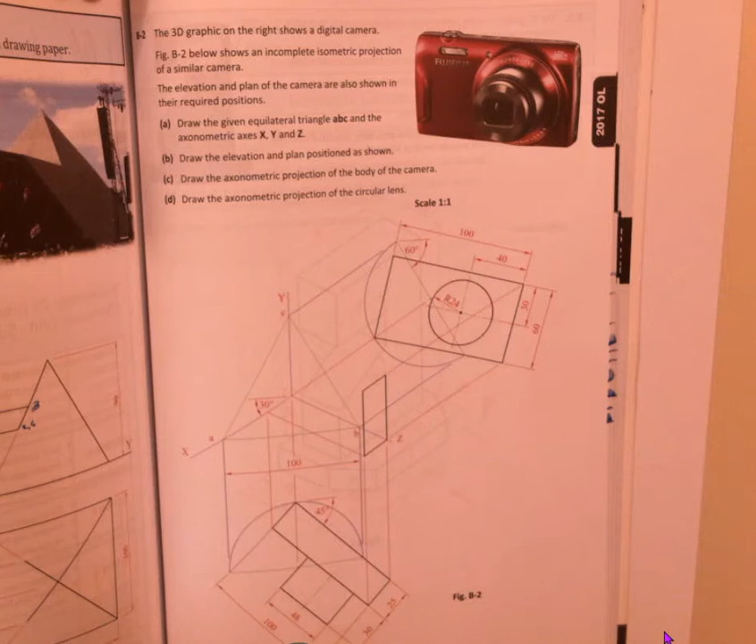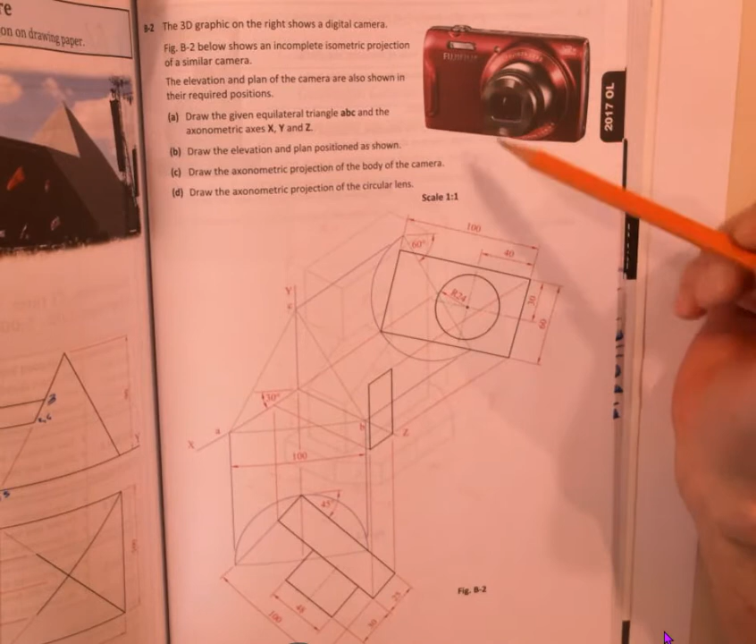We're on the 2017 ordinary level section B2. It is an axonometric projection question. So we've got to draw the axonometric projection of a digital camera. Part A of the question, we just have to draw on our equilateral triangle and our axonometric axis. It's base 100 millimeters. That's very important. There'll be marks going for that.

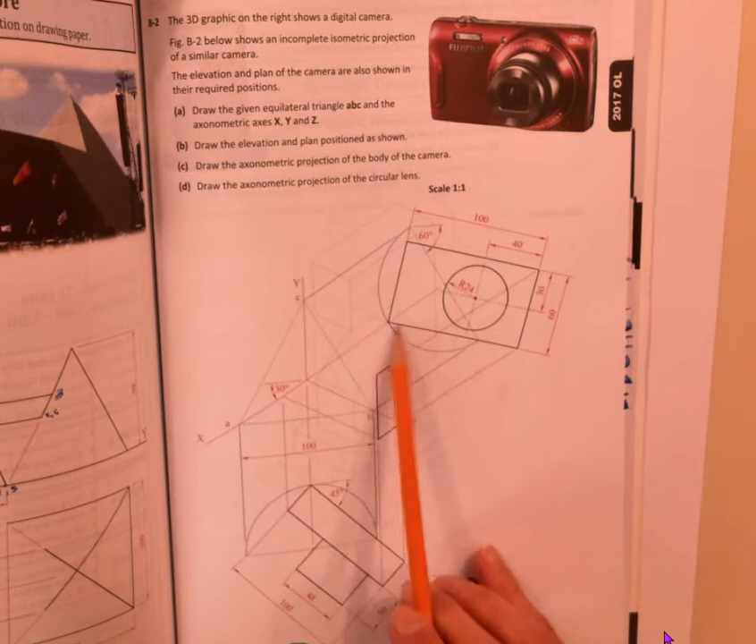So 100 millimeter base, 60 degrees and 60 degrees to draw our triangle. And then we set up our axis as we've done in the last few questions. We have to draw the elevation and plan positioned as shown. So the elevation, 60 mil high, 100 mil wide. That's pretty straightforward. We step in 40 to get the center of the lens, down 30 to get the center, and it's a radius 24 lens.

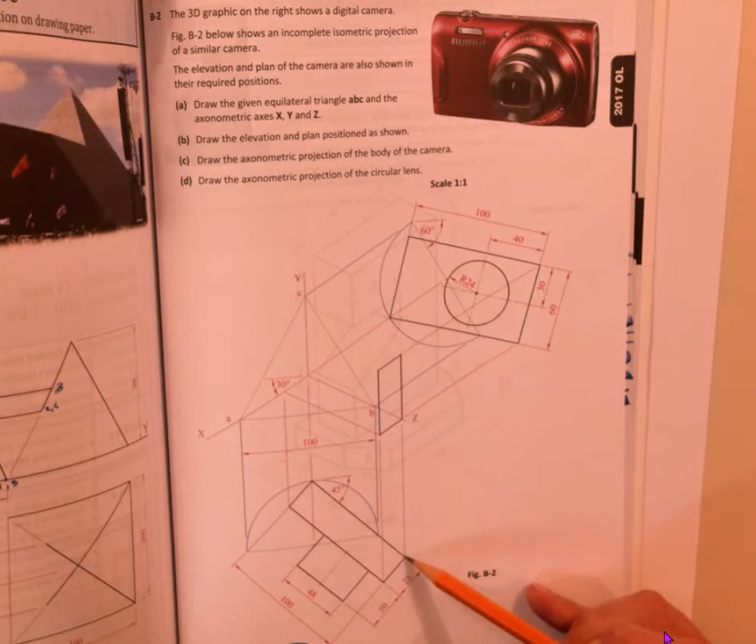That's as much as I've done on the setup. I'm going to start setting up the plan. The plan is 25 wide for the body, or deep for the body, and 30 deep for the lens. When I come along, I've got my triangle set up. We projected out at 30 degrees from each of the corners of the triangle, and then we had our 60 degree angle here. We drew our semicircle then to get the point for our axis.

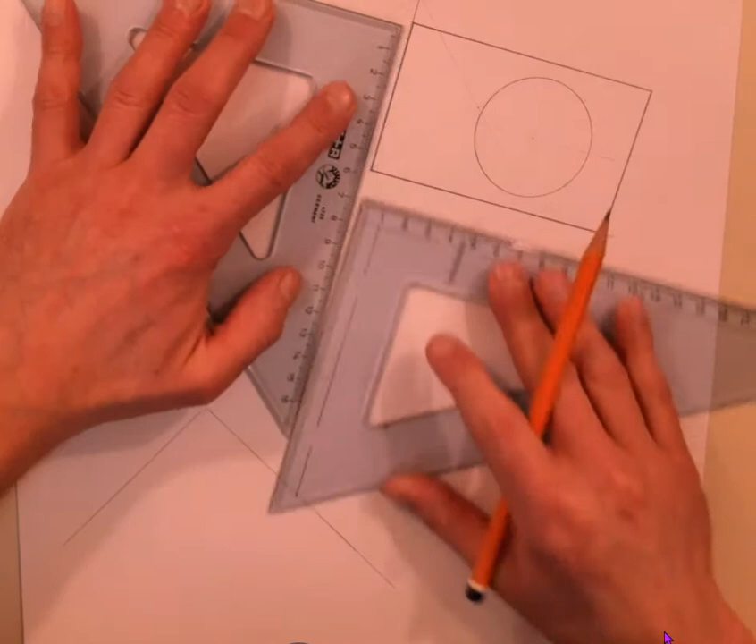So we have our two lines drawn. The elevation was 100 millimeters wide, stepped up 60 mil high, and you always take your lines parallel to the bottom and the side of the axis. Stepped in 40, up 30, and I've drawn in my radius.

Now, good practice is to copy my measurements from elevation. So in other words, instead of just re-measuring it, I'm going to copy my width here down to plan. So that's good practice. So just in case I've made a mistake on this, didn't make it the right width, I've copied the same width down. So my width for the body of the camera in plan is here, and then I go and draw it in. Plan is straightforward to draw because I can use the 45 degree set square.

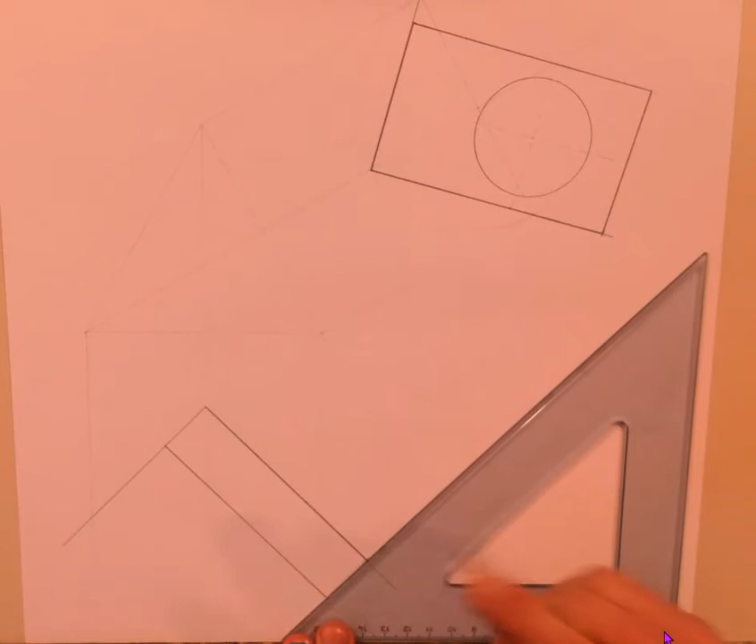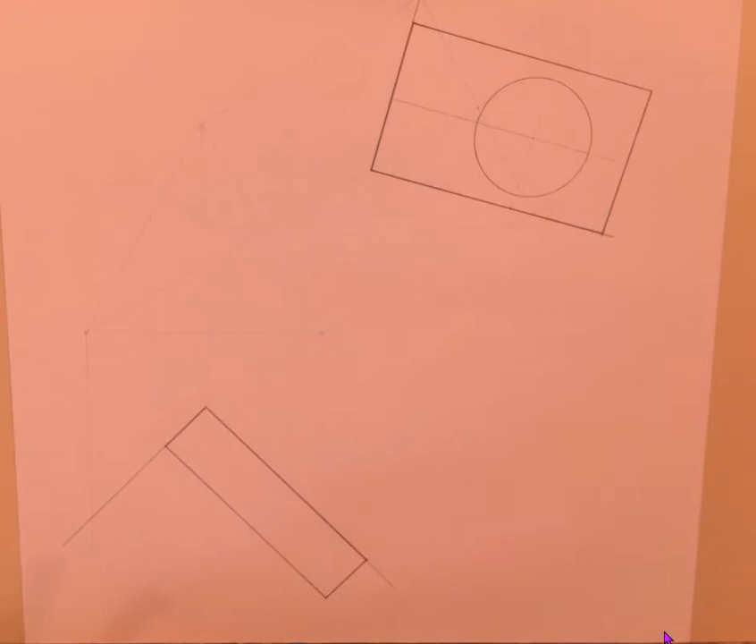Again, the body was 25 deep. Measure out my 25, and I can draw on the body. So that is the body of the camera drawn in. Now, I'm going to take my measurements from elevation again. So, as we've done before, I'm going to take just a line across here, just to make it accurate. What it means now, instead of messing around, I can come along and draw in the left hand side.

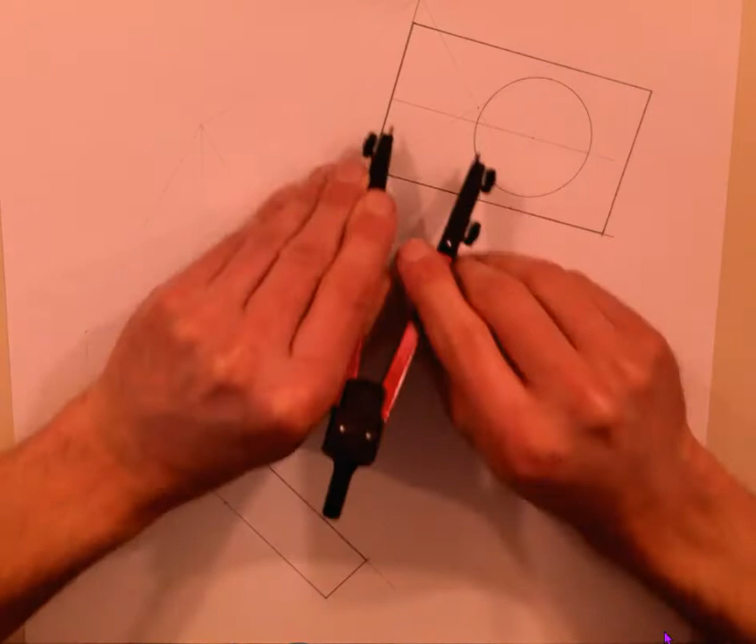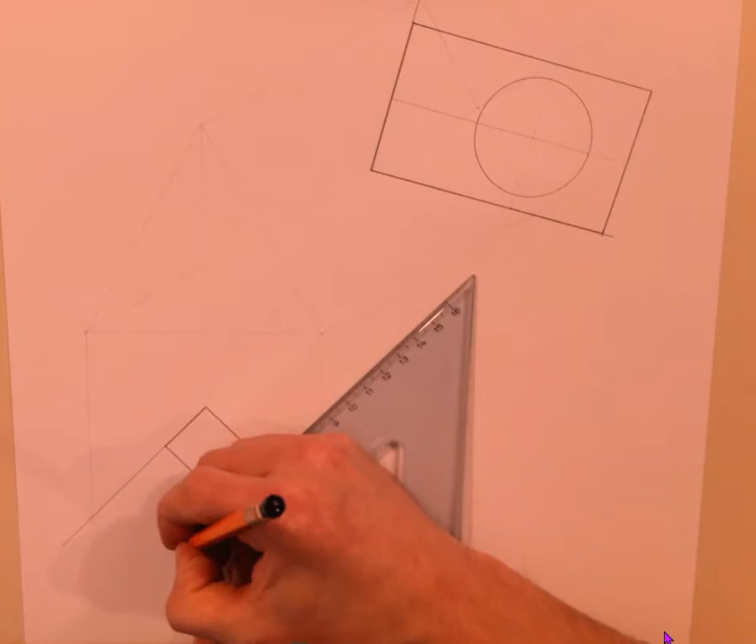So take my width, project it to plan, and take my width and bring that to plan. So that is the width of the lens. I've basically transferred the width of the lens down. Again, 45 degree set square to draw that. And we said it's 30 out. So that is the elevation and plan complete.

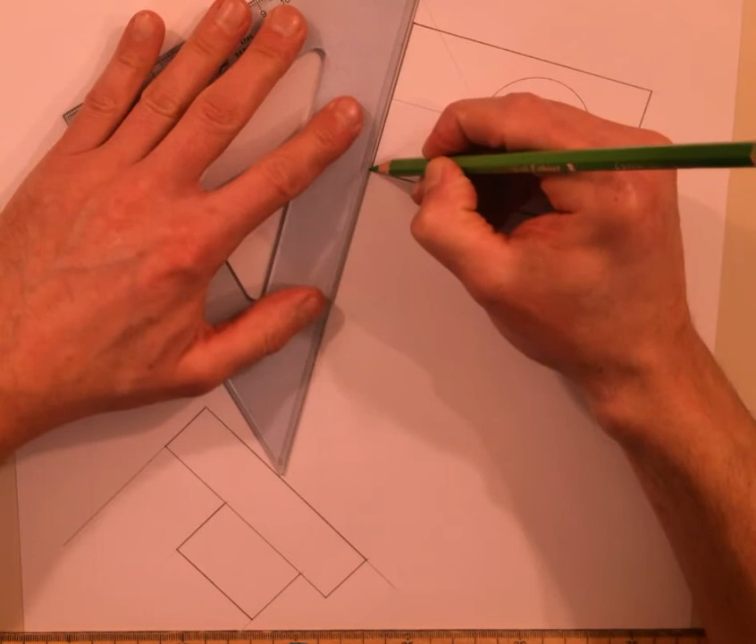Now, as always, I've got my axis here. The axis running up the way is on the left hand side of the drawing. I'm going to highlight that. So my axis is on the left hand side in the elevation, meaning I'm going to take not this one, I'm going to take the left hand axis. So because it's on the left in elevation, I'm going to highlight the one on the left in plan. And I'm going to use that because I'm going to label some points.

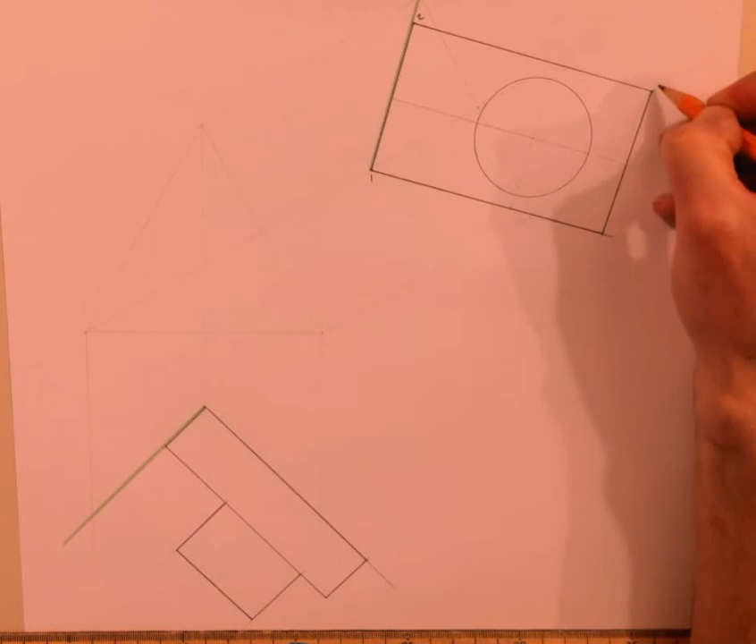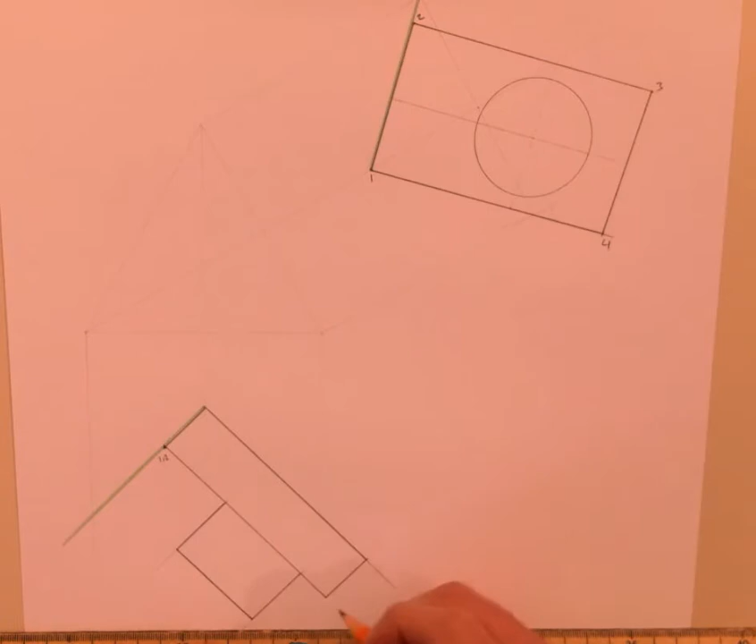The 4 points in the front, 1, 2, 3 and 4. Those 4 points are on the front of the elevation. I can see 1 and 2 are hitting the green line, which means that 1 and 2 are here. Remember, this is the front of the camera, this is the back of the camera, so I'm not labeling any points back here. I have 1 and 2. 3 and 4 are on the opposite side, so when I come down here to the opposite side, 3 and 4 are there. That's going to allow me to start drawing my main body.

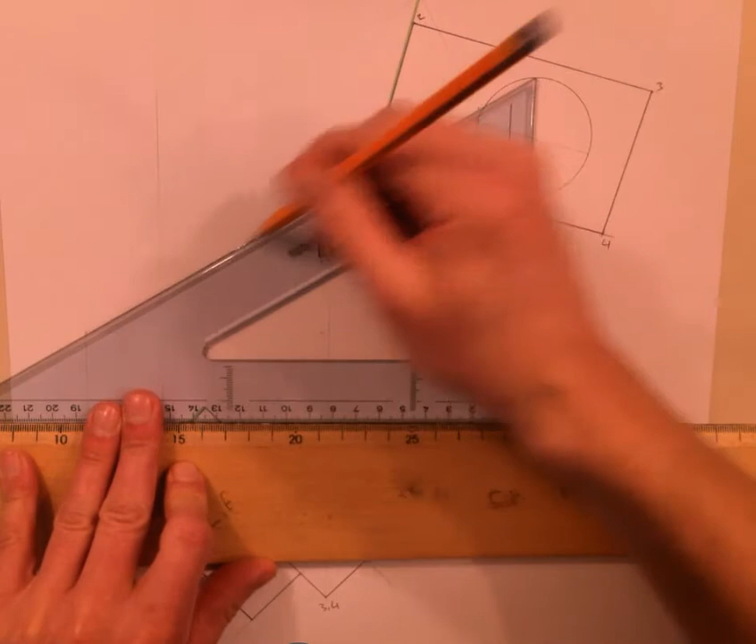So now I can come along, bring up points 1 and 2 are going to be on that line. 3 and 4 are going to be on this line. 1 and 2 are on this line. So when I take 1 back in, here's 1. When I take 2 back in, and again it's always at 30 degrees from the elevation, there's 2. 3 and 4 are on this line. 3 comes back in, and 4 comes back in.

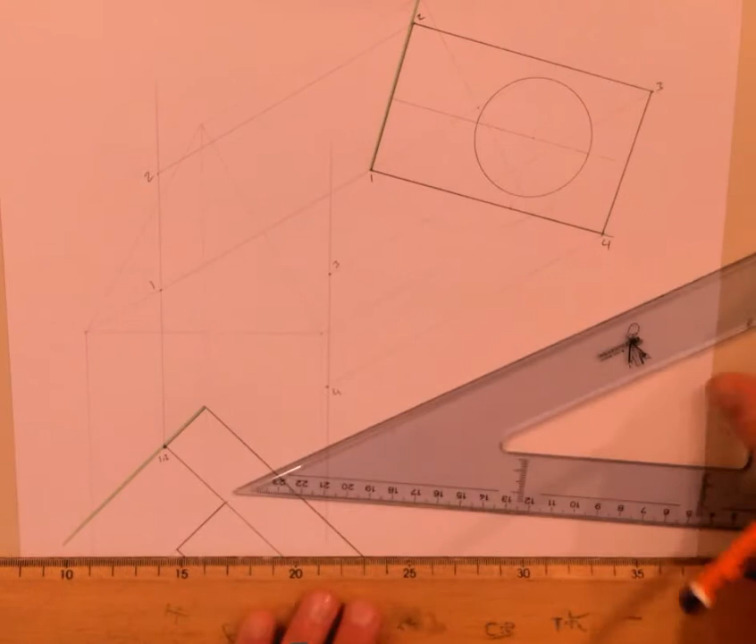Now you don't just join the dots here. You need to use your set square. This line should be at 30 degrees because in real life these lines are horizontal, so in the real life camera. So when I come along, I should be able to join this, and I make it join. I'll actually cheat a little bit and move the dots if I have to. They're pretty good.

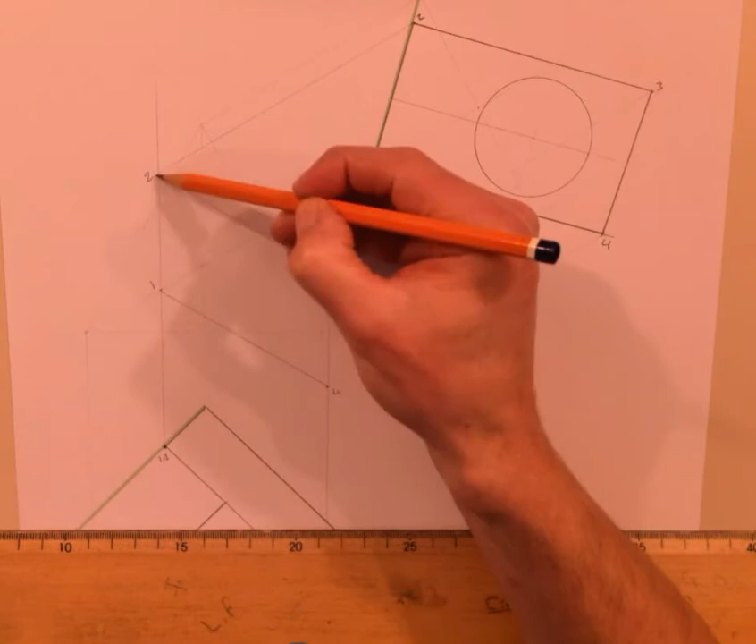So now what I've got is the front surface of the camera. At that stage, I can come and bring up the back surfaces. I've already got my construction lines. I'll darken them a little bit so you can see them. These are going in 30 degrees this direction, and they're basically the sides of the camera already done for me.

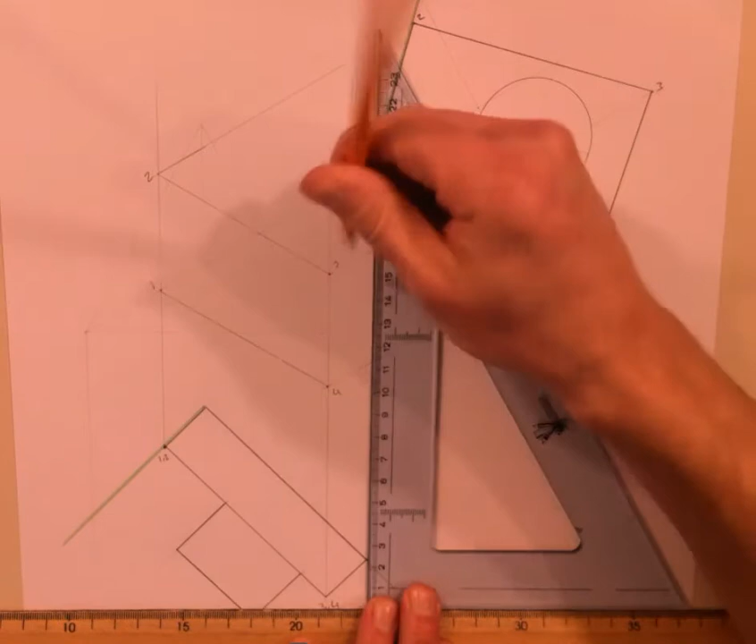I've got my back corner of the camera here. I can bring that up, and now I can draw it in. There's the back surface of the camera. And my back corner here, I can bring that up, and that gives me the back surface of the camera. And again, that back surface should be able to be drawn at 30 degrees.

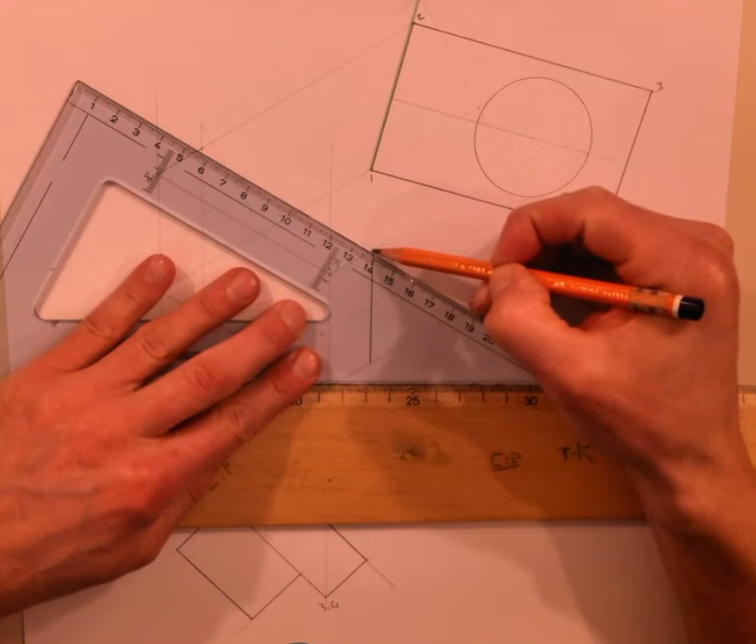And it's a little bit off there, so what I'm going to do is cheat a little bit. I'm going to move this point out slightly and make it work. And the idea of not just joining the dots is so that you get a very neat looking drawing. My drawing there looks perfect. If I were joining the dots, some bits of it might look a bit out of shape. I'm not going to darken this line because the lens is going to cover that later on.

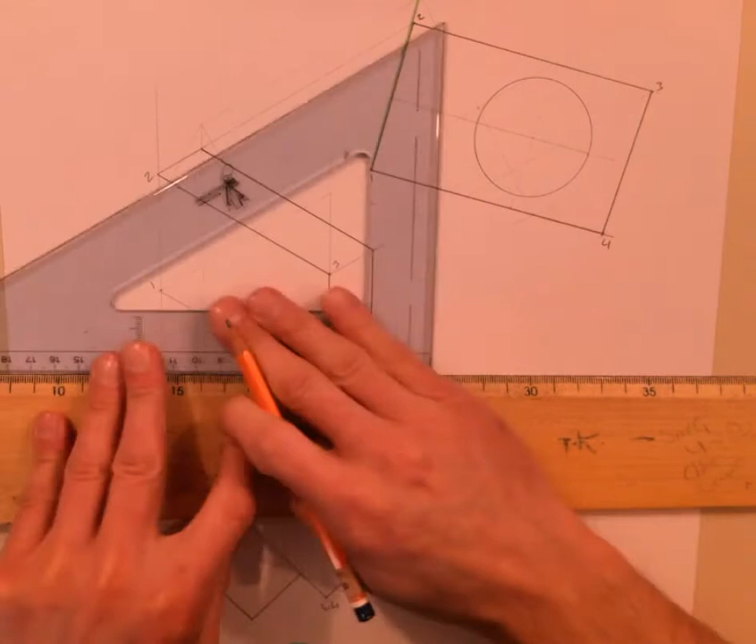So I've got the main body drawn in. That's part A, B and C done. So you've 2/3 of the question finished. The tricky bit now, which is worth about 16 marks, it's a good few marks, it's worth about 1/3 of the question, is my lens. I have to convert the lens down. So basically I have to get the lens and draw it down here.

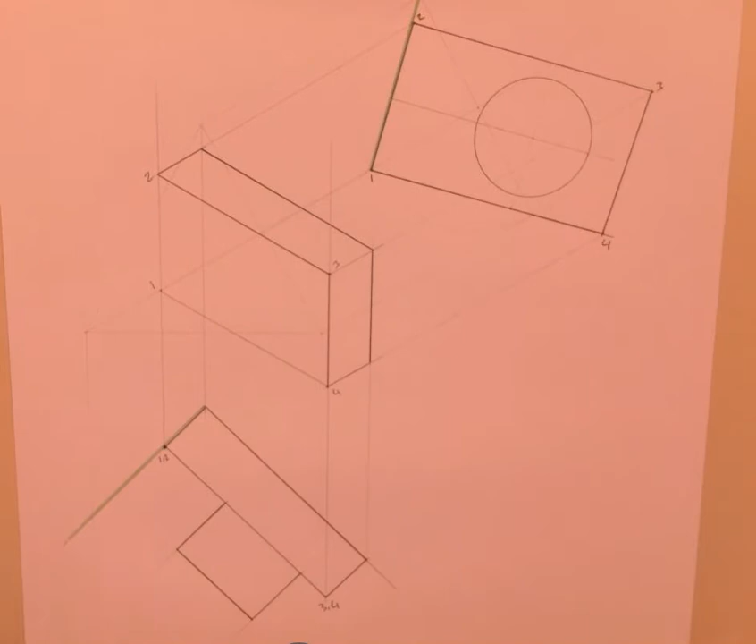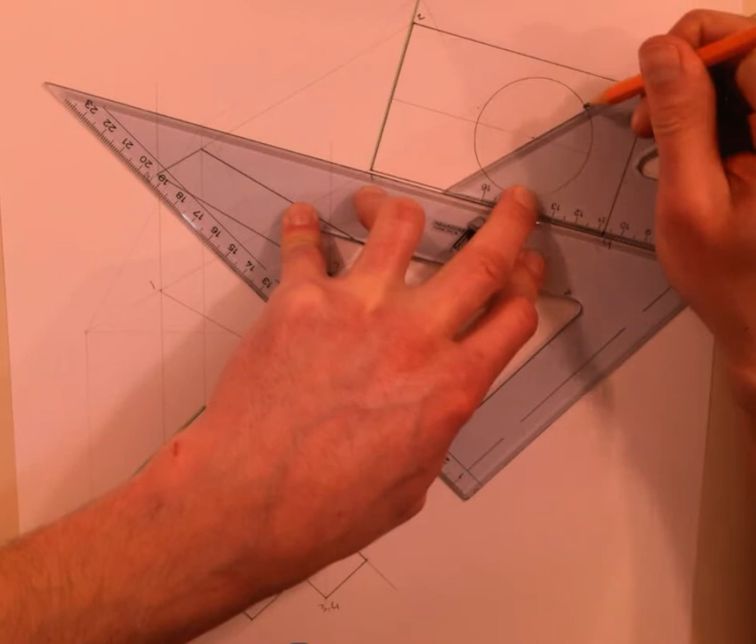It's a circle, we always have to divide it up. So dividing the lens, again I'm only going to use 8 points because 12 is just too many when we're doing these axonometric projection questions. So all I'm going to do, again, you divide off the bottom line. So I've got a set square on the bottom line. To divide it up into 8, I'm going to use my 45 degrees set square. And then 45 the other direction. I'll have to move that down just so it's going to hit the camera evenly.

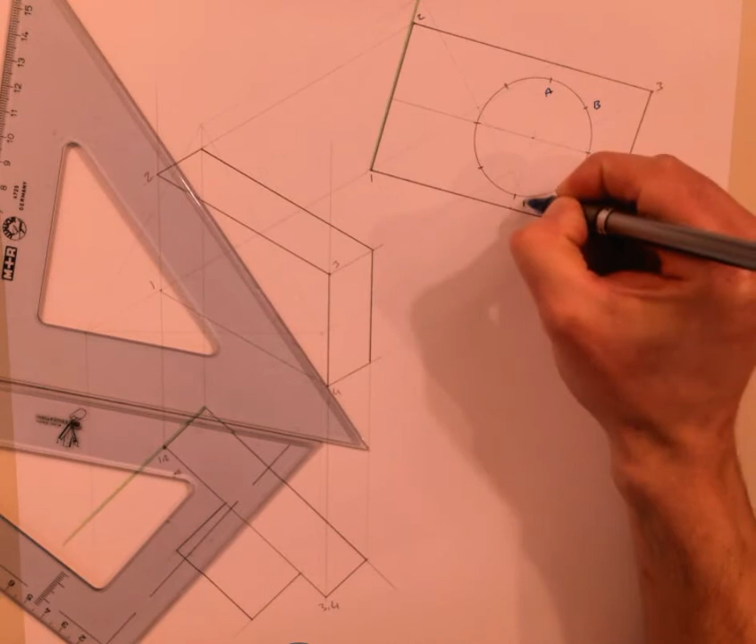So I've got my 1, 2, 3, 4, 5, 6, 7 and 8. And I'll go and label them straight away. It doesn't matter what I label them. I might label them A, B, C and D. So I have A, B, C, D, E, F, G and H. And it doesn't matter how you label them.

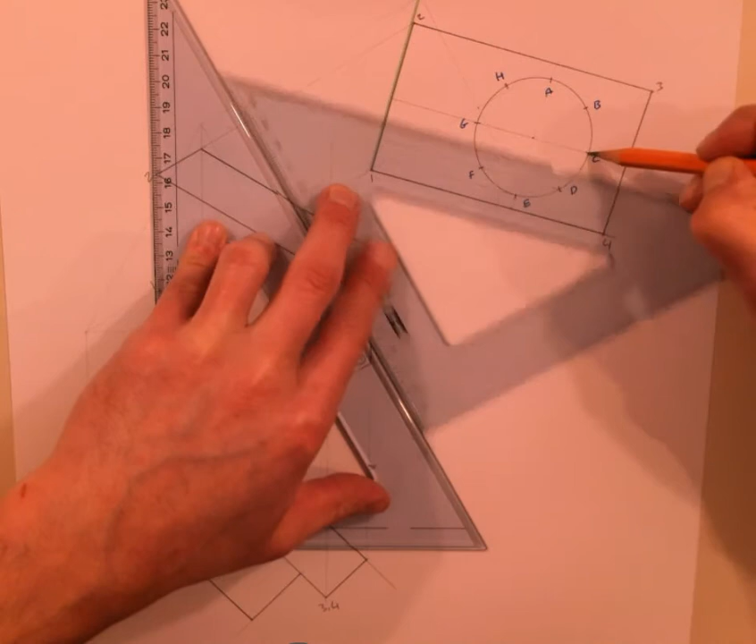Now again, I need to transfer the heights down, or the widths down. I have to do the same thing as I did here. I drew a line across. So all I'm going to do again, parallel to the bottom, I'm going to take construction lines across E to D. Those two are across, those across, and there. What that's going to allow me to do is accurately measure the distance to A, distance to B, distance to C, distance to D, and so on. So when I come along to do it, I want to transfer the markings down to here.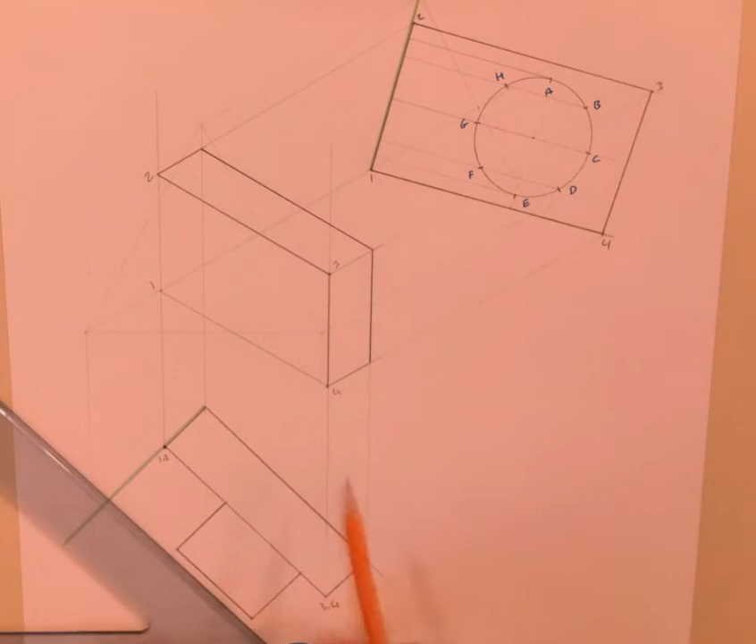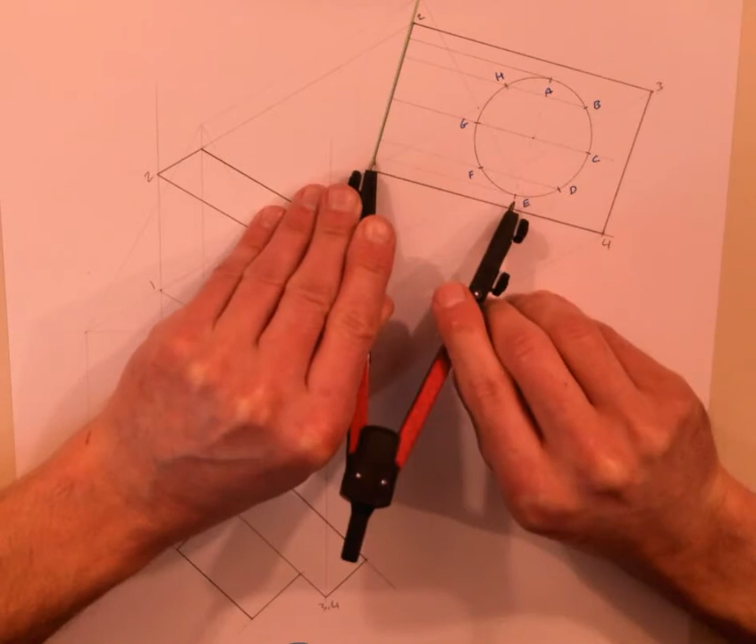Now, I'm going to start on the front of the camera. So I'm just going to put the same construction line. So these construction lines that I've drawn, this big long one here, here's my construction line. I'm taking the front surface of the lens, here's the front surface of the lens. So same thing as I did earlier on in the question. Point A, and I'm going to do the two together. We've done this before. Point A and you'll see point E are the same distance. So when I come down, I take my distance again from the green line over, green line over. So that is where A and E is.

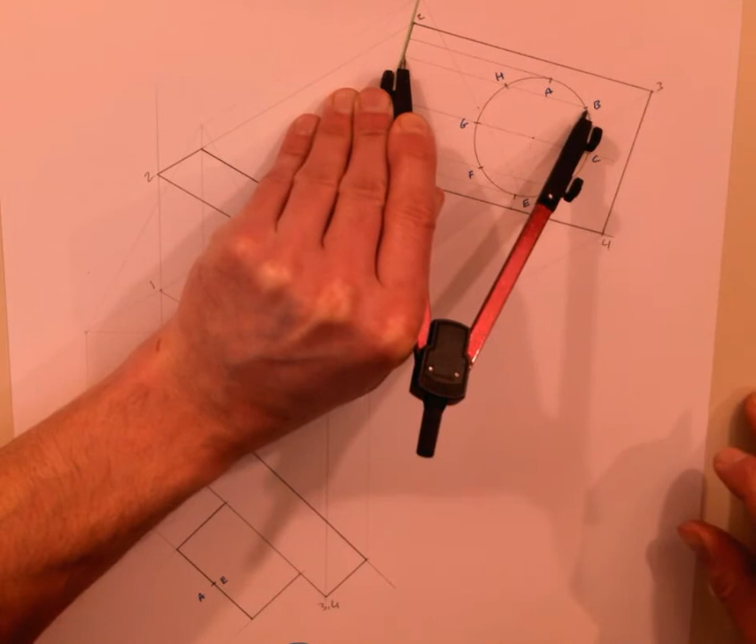When I come along then, point B, here's point B, and again point B and point D are the same distance. So when I come down, that is where B and D are. C is on its own, and C, you'll notice, should be at least the far side. So here is C. Point E, I've already got.

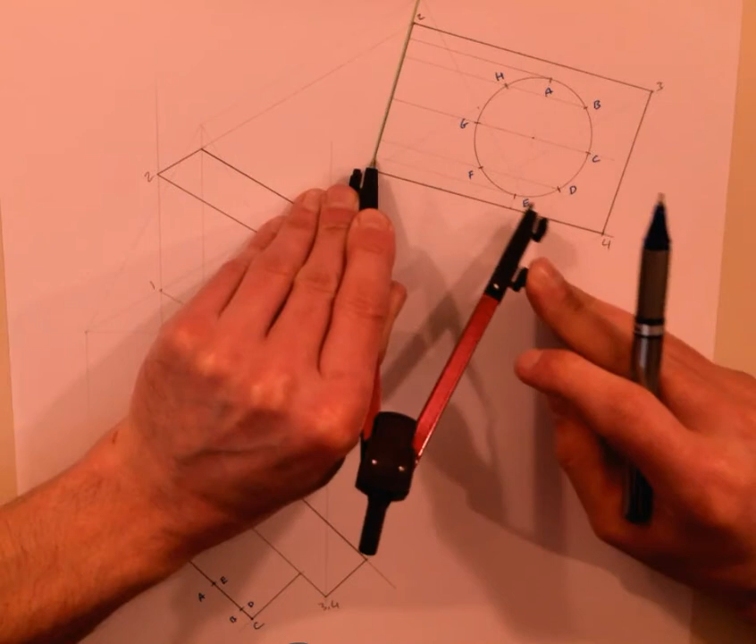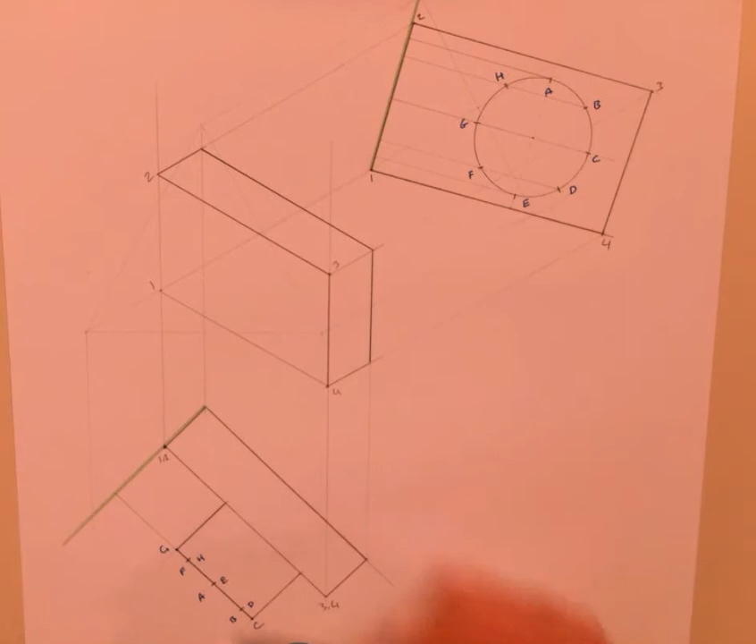Point F, and you'll see F and H are the same distance. So when I come down, I've got F and H, and point G should be the last one. Here's my distance for G, and again that should be the corner of the lens, and it is G. So I've got points A, B, C, D, E, F, G and H are all here. I found the points, and that's the tricky part, getting them in the elevation and into the plan.

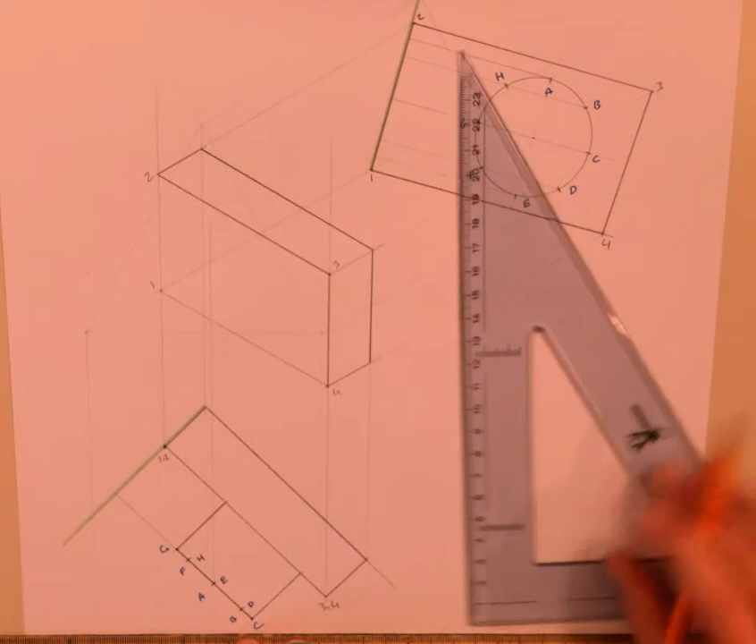Now I can find the points in the axonometric view. So I'll take them up and I'll do them one at a time to begin with, and then we might speed it up a little bit after that. So I'll take point A up. A comes up and A comes back in. So A from elevation comes in. That gives me A. B comes up and B comes back in. So there's B. I'll do C.

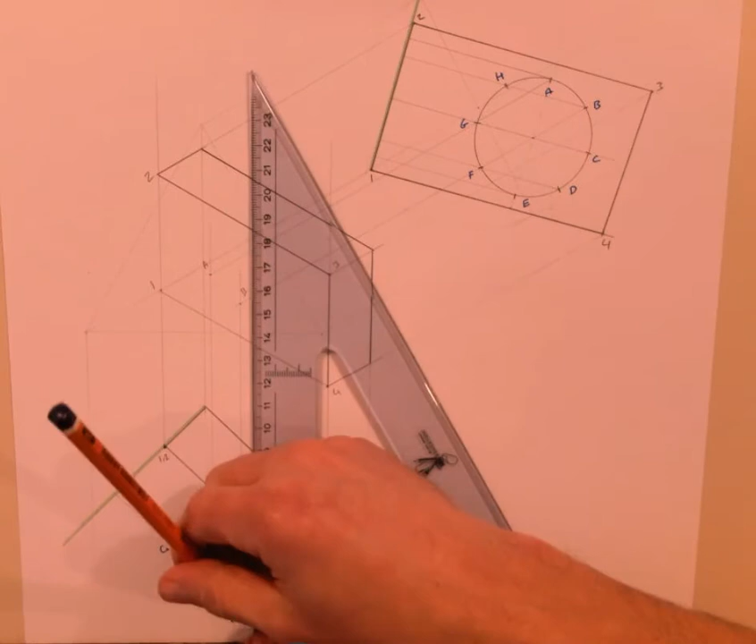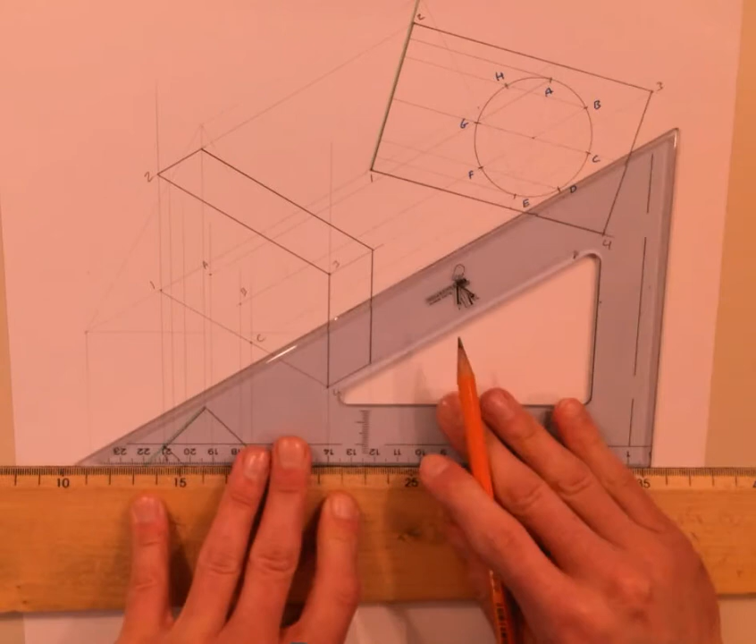And C comes back in. Now, to speed it up, what I can do is bring all the points up in one big lump. So I've taken my construction lines for all the points up, and I'll bring the construction lines for all the points back into the drawing. And so I'm taking every single point back in. I'm not worried about finding the points yet. I'll do that in a minute.

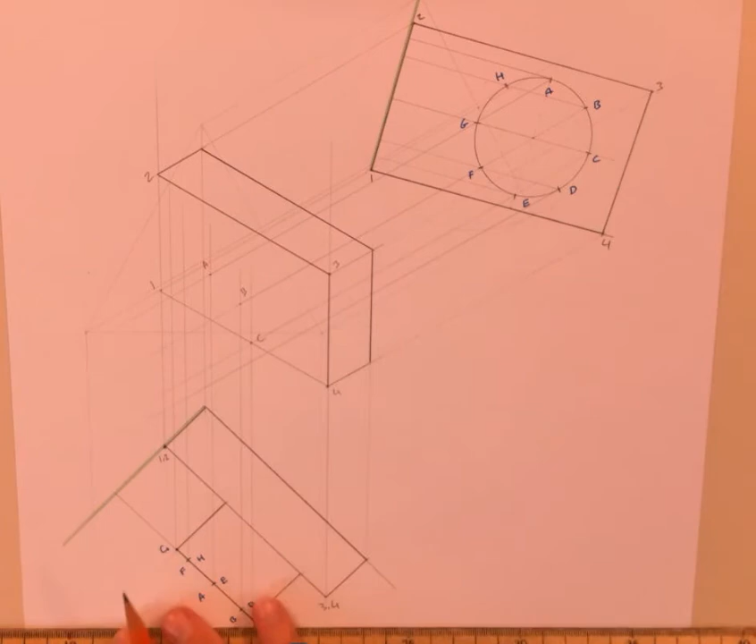What I end up with is a big jumble of lines here, so it's a bit hard to make out. That is where the set square comes in handy. So I've got points A, B and C found. I'm going to come back down to my plan. I'm going to put my set square. I want to bring point D up. Here's point D. I'm going to leave the set square there. With the pencil, I'll follow D back in. And there's point D.

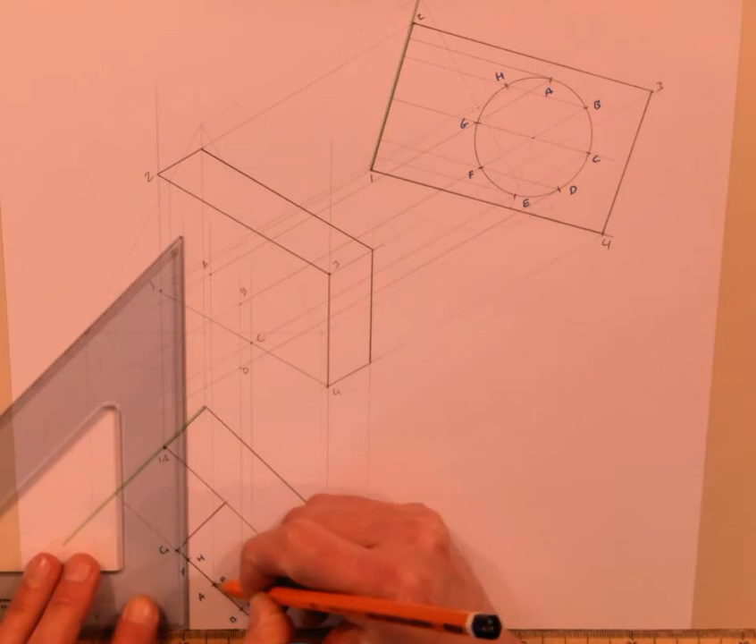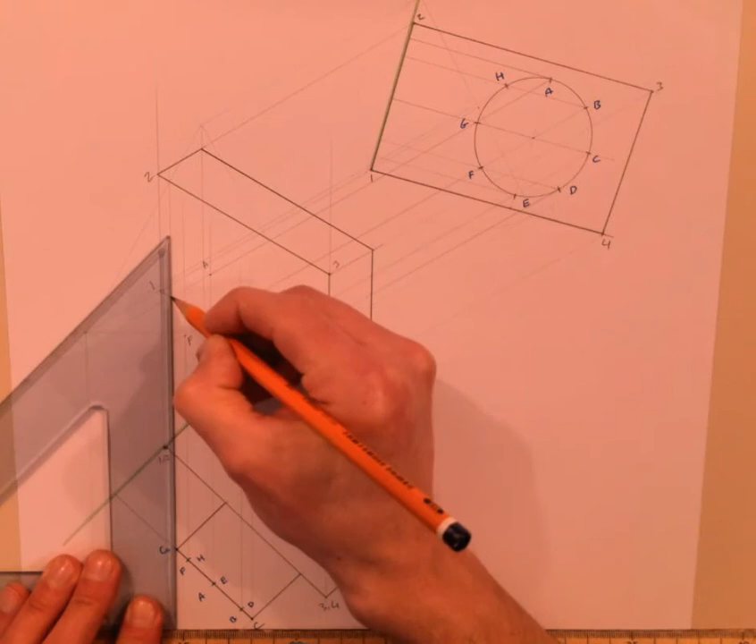E, same thing. Put the set square at E from the plan. And I'm going to follow E in. E comes down here. When it hits the set square, it's in the right place. F, same thing. I'll follow the line back down. There's F. And G. And then the same thing, take G down. A, B, C, D, E, F and G. I'll draw that in now freehand.

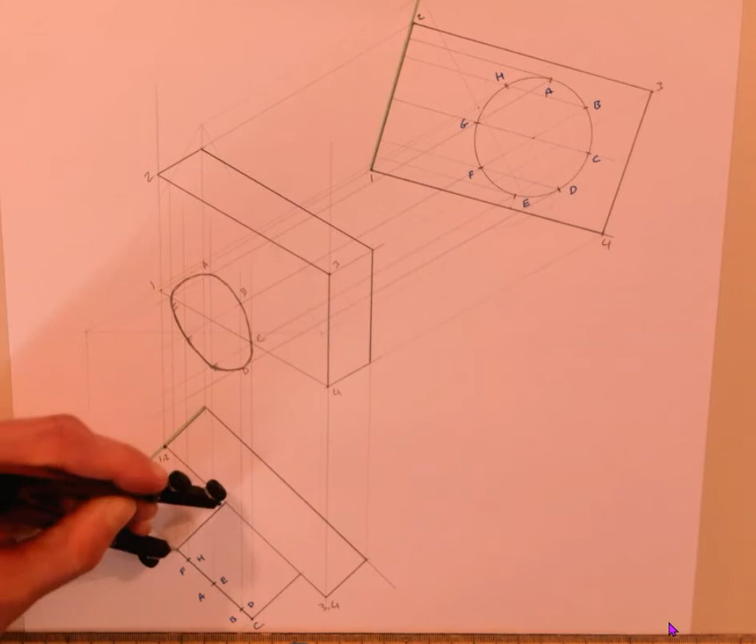Okay, so I've drawn the curve in. It's a little bit rough because I didn't take it off the board. I don't want to be taking it off and putting it back on. You'll be able to either spin the board or take the sheet off. Now, I have to find the set of points that are in behind. It's a lot of work to go and find another 8 points back in here. I don't actually need to do that. What I can do is cheat a little bit. I know that the lens is 30 millimeters deep. So that's the depth of the lens. It was 30 mil. What I can do is take back all my points. So I've got A here, and point A comes back in to hit.

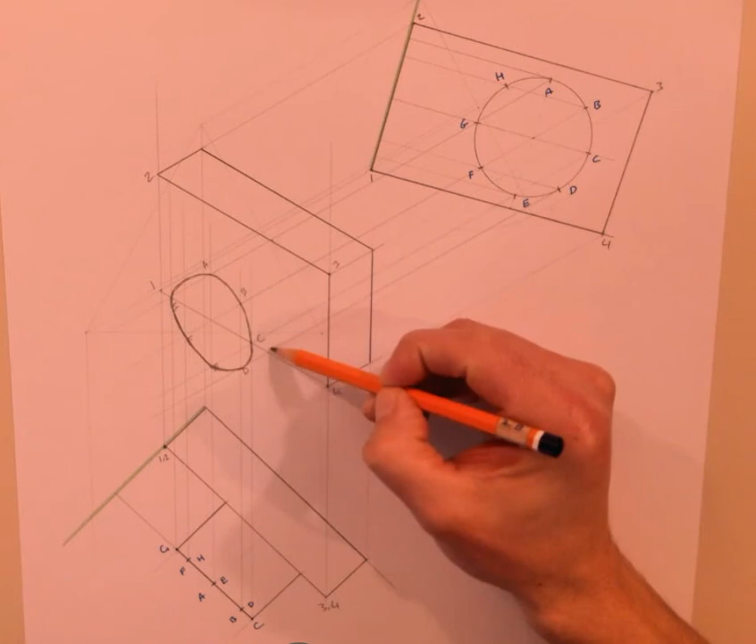Okay, so I've drawn in the curve. It's a little bit rough because I didn't take the sheet off. You'll be able to spin your board or take the sheet off. I couldn't do that because I'd have to put it back on underneath the camera again. Now, I have to go and find the other set of points around about here. And that's going to be a lot of work because I've got 8 points to find again. The 8 points would belong here. I'm going to cheat slightly. What I'm going to do is just find one of the points. So, point A is the one I'm going to find. I'm going to take it back here.

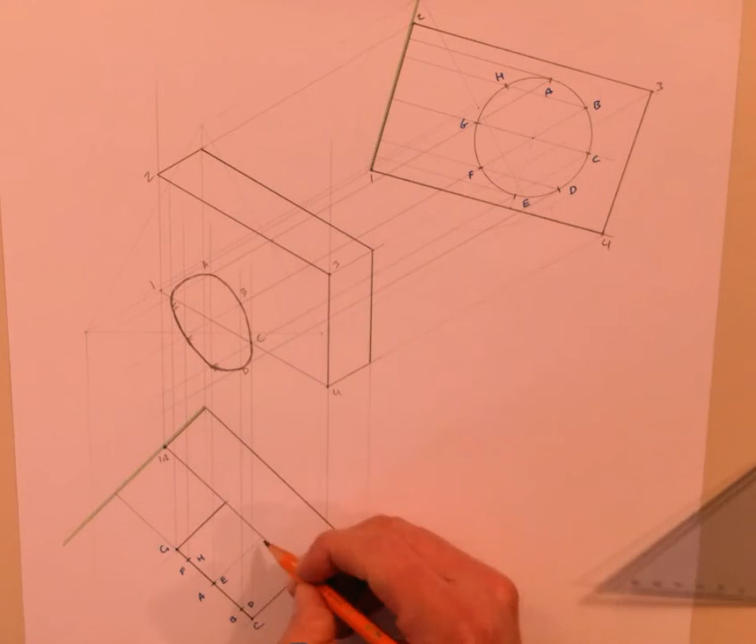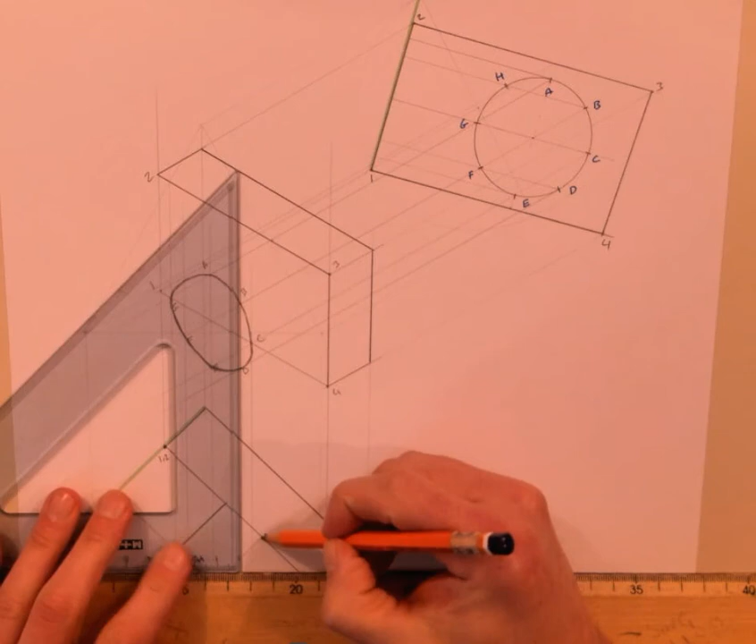So what we would have is point A at the front and A at the back. And if I go back to the actual question, that means a point on the front of the lens and then the same point in at the back of the lens there. So it's the same idea. I'm going to find that point and then I can copy all of those. So if I come up, I'll take A up and again follow A back in, and it gives me point A here. So that gives me the distance or the length for the lens.

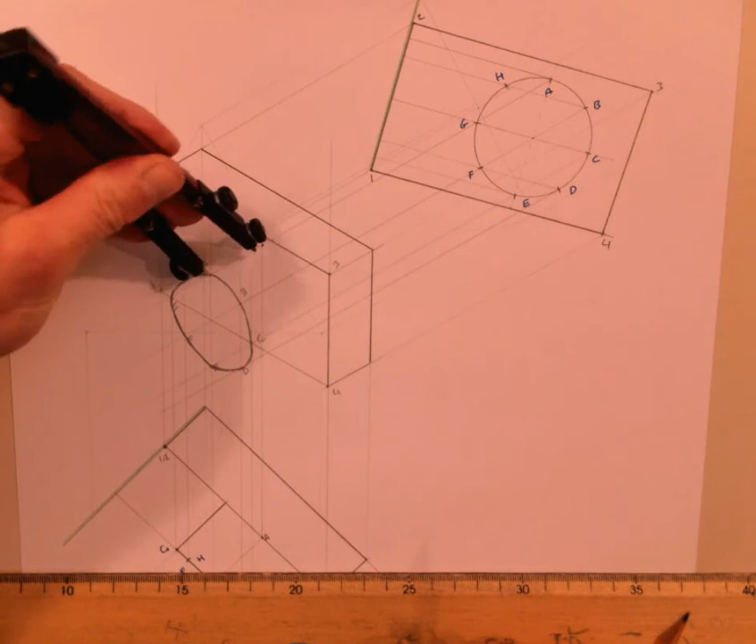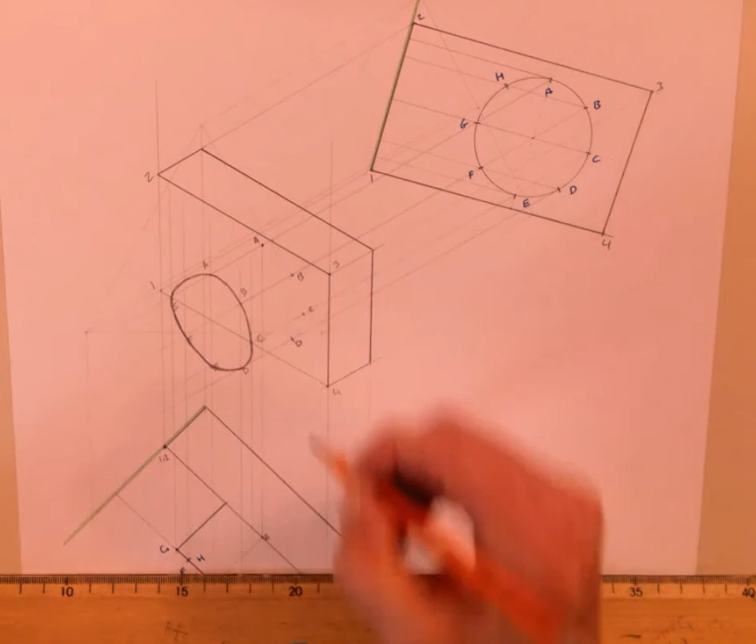What I can do now is I can come along and just copy that around. So here's my distance on the compass. That's the length of the line. I can take the length from B. That's where B is at the back. C. D. And I'll exaggerate it slightly to show I'm using the compass to find the points. There's D. E is hidden in behind. F is hidden in behind. G is hidden in behind. So I won't see any of those points. So the only bit of the curve that I'll actually see is those 4 points shown there.

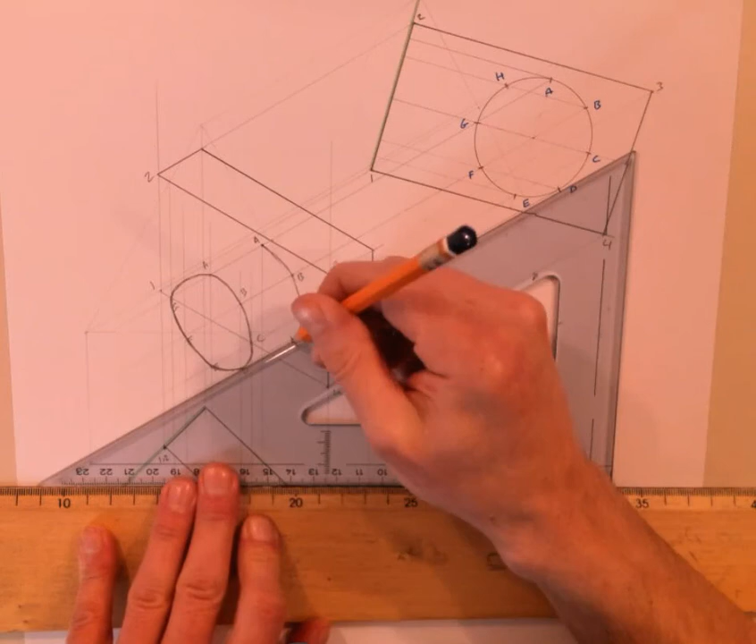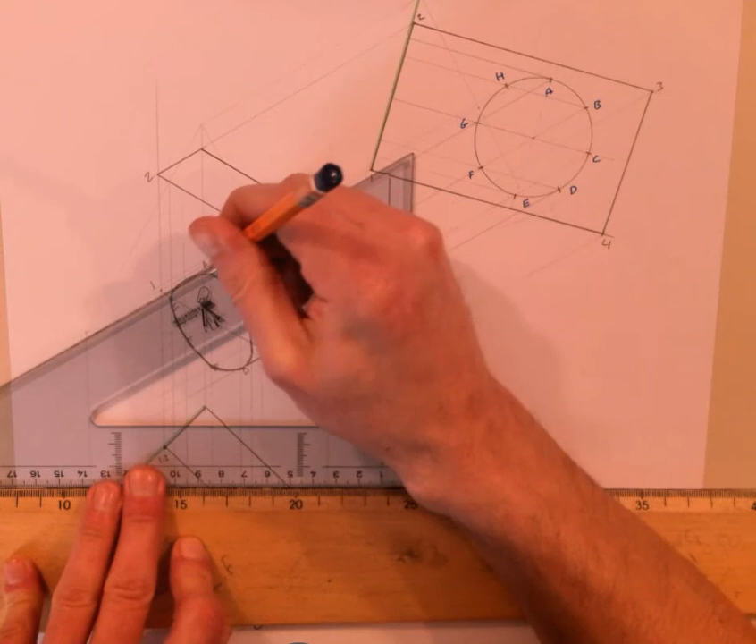What I need to do then is just cut the curve off. So the curve cuts off here. So it kind of fades in. Same on top. Now you'll see on top I have to come out slightly. So I come back here and I'm just going to fade the curve into nothing, and that gives me the completed curve. So it just means that I don't have to go finding a big load of points. Now I can finish out the drawing. And that is the question complete. See how you get on with that.